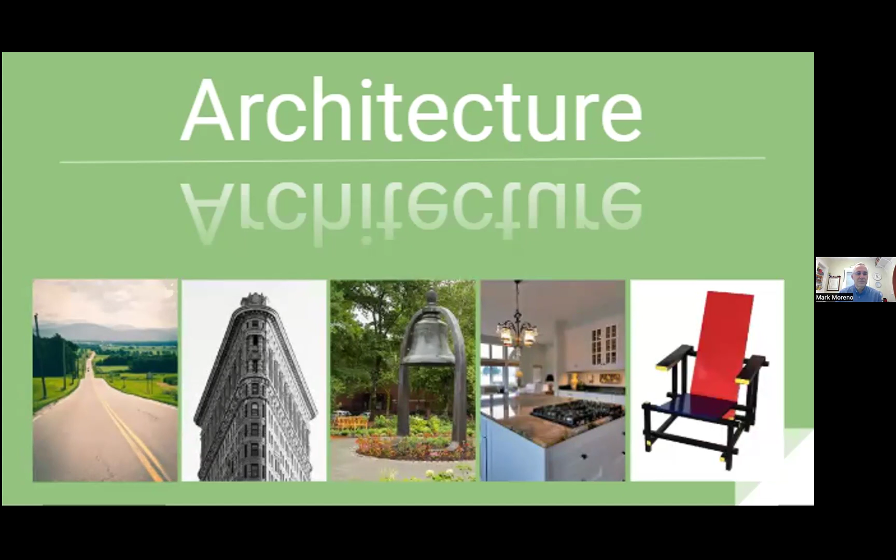Further, though, even more broadly, we're going to be talking about the design of streets, neighborhoods, and the idea of whole cities. Even further, architecture is a reflection of us as a species, and these are areas that I teach in. I teach person environment theory in a class called placemaking, and they're seriously dear to my heart.

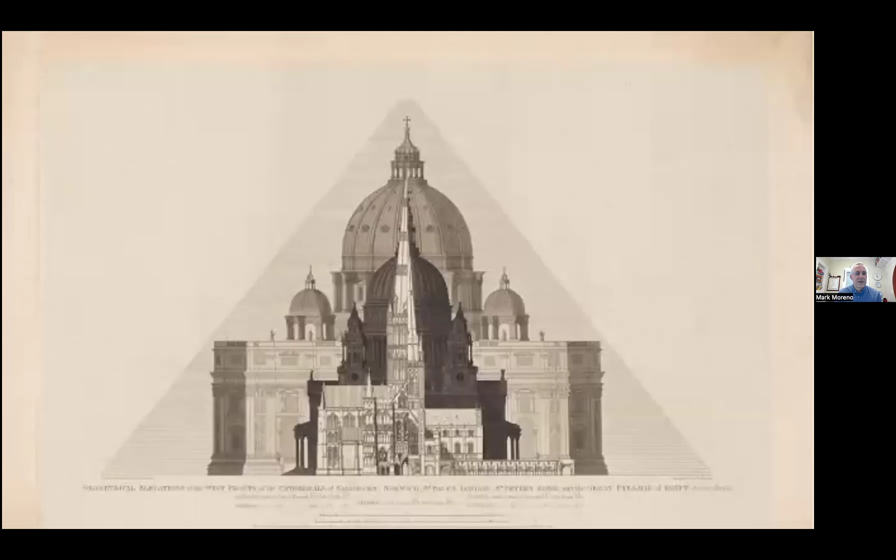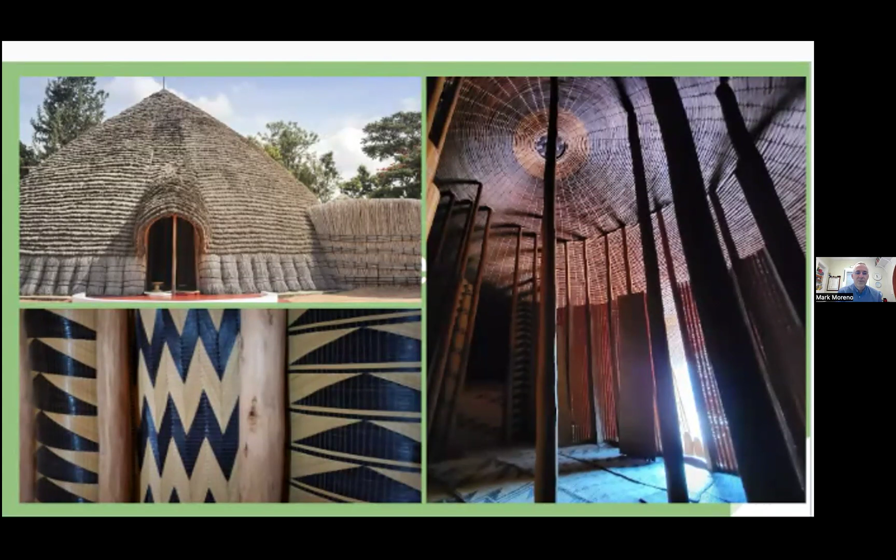Anecdotally, we don't have to have the most grand of buildings to understand the culture of a place. This is the former king's palace in Rwanda. I happen to be able to go here, and I'm sharing this. This is a beautiful, and wondrous space, that shapes and forms and structures, color, texture, and light.

Architecture also records some of the greatest of the world's tragedies. They become etched in our minds, and their memories stand as testament to human failings, individually and collectively, as testaments of heroism and awe also at the same time.

These are just a sprinkling of ideas about architecture, scratching the surface, so no one can comprehend the fullness of architecture's power. We each find our individual connections with architecture's power, be they subconscious and or conscious.

My hope, though, is that we each find an experiential fullness in the places that we find ourselves, be it at the Pantheon in Rome, which shapes and literally owns a slice of the sun, I guess figuratively, or a dabbling of light through the trees and window panes of a family breakfast nook. And while pondering these things, all great architecture wants to live a long and sustained life. But the only way to achieve this is to build better.

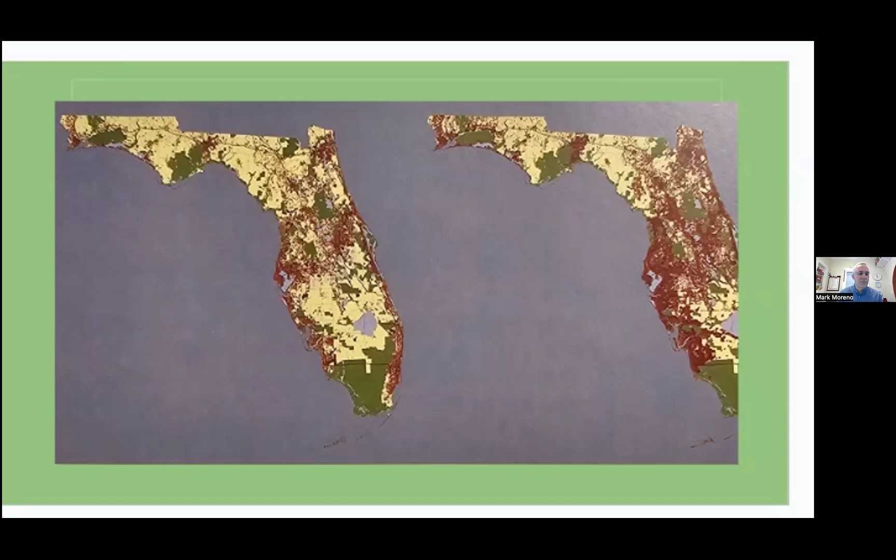So this is Florida, and a projection, it's a 50-year projection outward. So the red zone talks about populated areas, more densely populated areas. And the red in the right side image projects how much farmland and other land will be consumed if we continue to build in the manner that we're building.

So I've seen this analogy before, I think even in Environmental Fridays. The boiling frog is a metaphor that describes how people can become unaware of or unwilling to react to gradual threats. The metaphor is based on the idea that a frog placed in boiling water will jump out. But if a frog is placed in tepid water that is gradually heated, the frog won't notice, and the temperature will rise and the frog will perish.

So it's easy to understand, I think, from my own personal experience, that individuals don't really fully understand the impact of architecture, and this kind of architecture, and maybe not even understand their ability to make effective change. My wife and I studied architecture together, and the first time we ever really understood what is a real place was on a trip to Rome. And we walked around thinking, wow, this is real. And when we came back, I became depressed. We both became depressed, living in a place that was so placeless. And the formal eight years of my education didn't, at that time, from the 80s to early 90s, have a full grasp of this either, in architecture, that is.

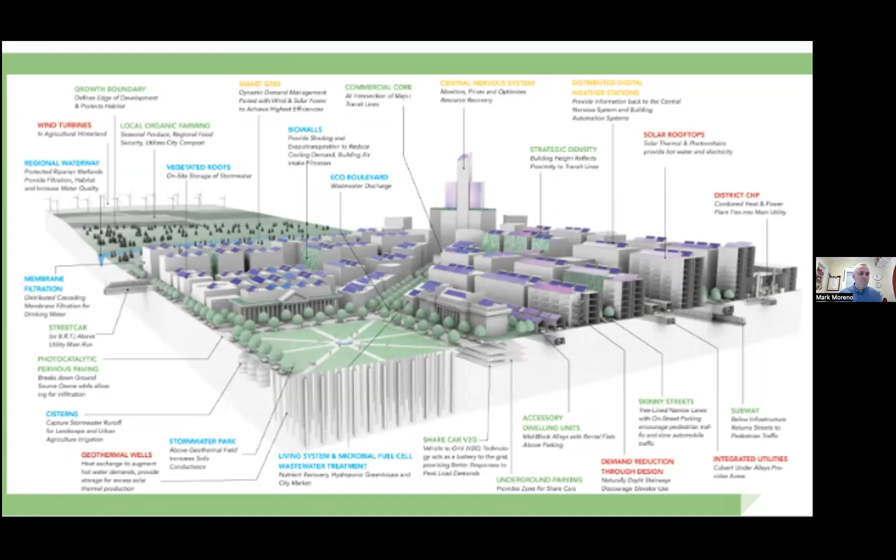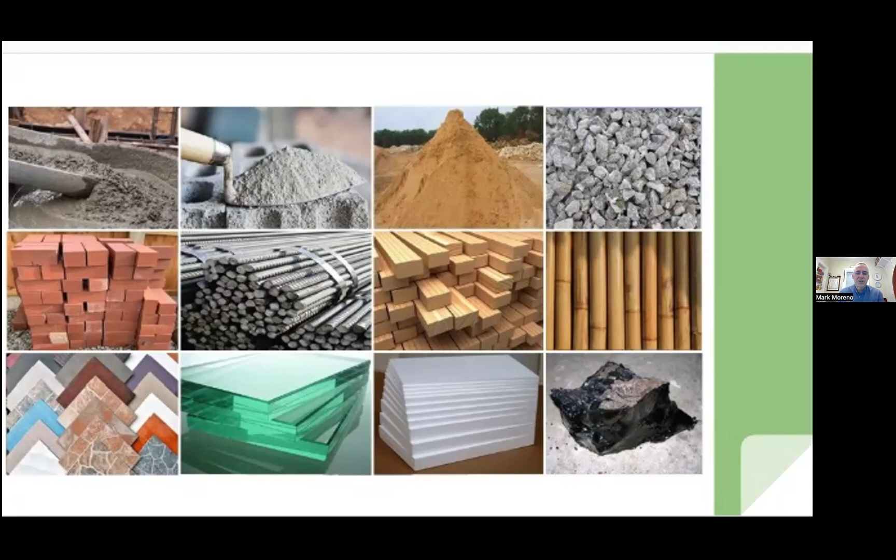Architects and engineers are involved in countless understandings, learnings and teachings about materials—recycling and using materials made from waste, materials that need less energy to produce, materials that use less water, materials that absorb carbon dioxide, which is a cool thing, and using renewable sources like timber and hemp for rethinking what is concrete.

There are organizations taking bold steps toward promoting greener living. LEED stands for Leadership in Energy and Environmental Design, a green building initiative. It's been around for a few decades, and people building buildings can apply to get a certificate, but it's largely expensive. Sometimes when you're chasing the tick marks to check off what you've done, it can stray from the fullest greenness. But again, it shouldn't be damned—it's a really great program.

After LEED came into popularity, the Well Building Institute started focusing on the greater impacts of what it means to people's human health and well-being. Buildings can be certified as Well Buildings when they've taken into account the quality of the air, the water usage, nourishment, light, fitness, comfort, and the comfort of the mind.

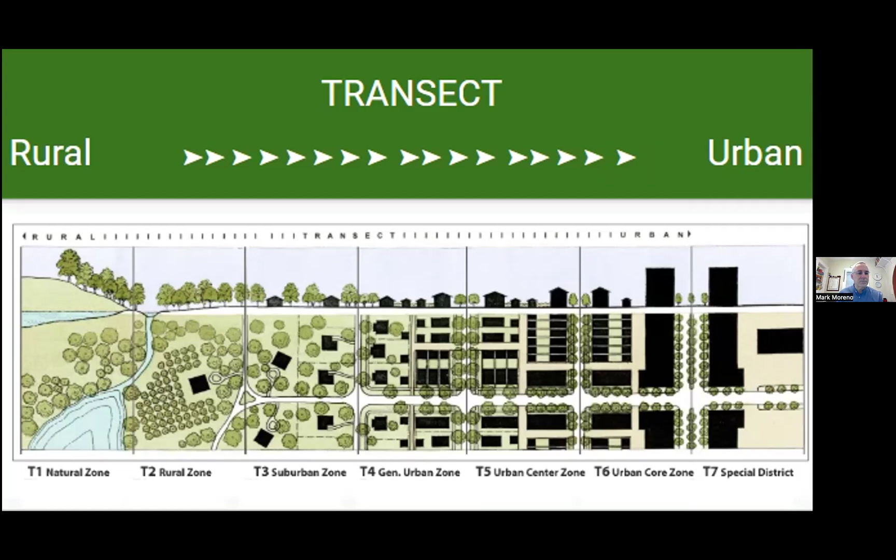New urbanists have changed the ethos of code regulations. They're making place-based codes, form-based codes, and redefining the authority that engineers and architects must follow. Some have even called me a communist because of my thinking that we can make compelling places—I used the word 'compelling' in a public forum once, and someone thought that meant making people do one thing or another. That's not what this is about. It's about providing choices for jurisdictions to make places that are walkable, because the codes are telling us what to do and what not to do, and it's not as healthy for us.

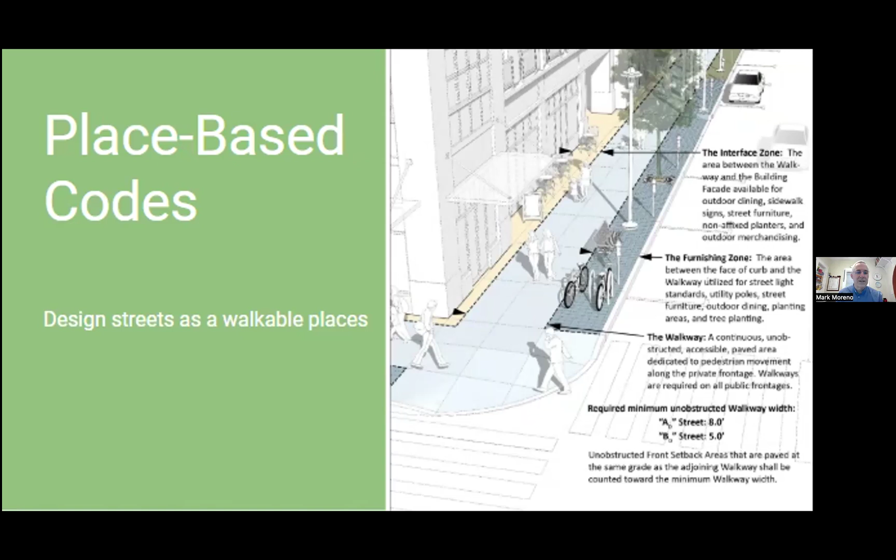So the discussion is, all of these words here are relatively new in the last few decades, at least within the span of my career. I'm not going to go into all of them, but all of them are hugely meaningful and important to the greening of the planet, and all of them are worthy of our accolades for sure. Only a test of time will make us aware of their best and truest efficacies.

All this is really to say that nature and cities are two sides of the same coin, and respect for one another—one can't exist and thrive without the other. We don't put walls around our cities anymore for protection, but we have a different enemy to fight, and that is the threat of global warming and calamity.

So architects are looking at different devices and strategies for making cities more walkable, more enjoyable. This is a term, one of those on the previous slide, the 15-minute city, where everything that you need—doesn't mean you have to live within the boundaries of that—but everything you need can be found within a 15-minute walk.

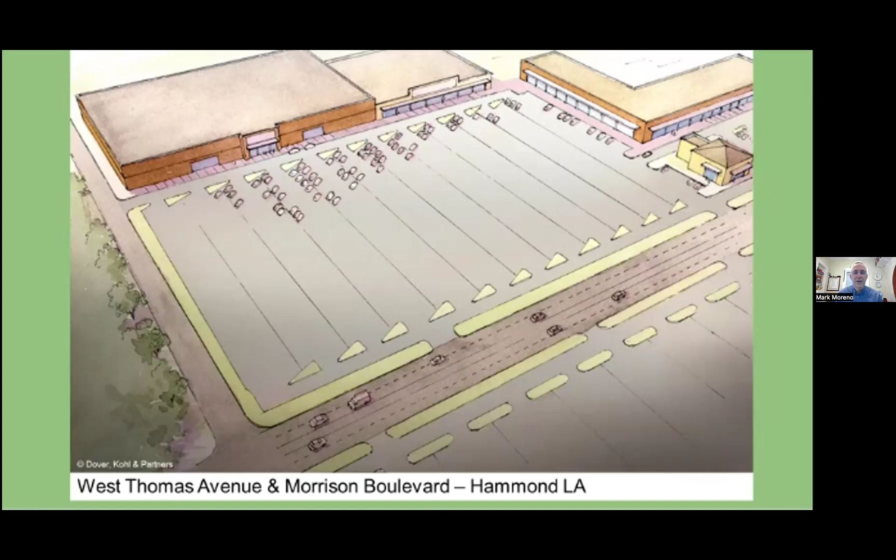Except on the fair day, like if this were Apple Valley, then we would say that the youth fair might fill this parking lot. But I trust that if it didn't, then the neighborhood streets surrounding it could bear the brunt of an extra traffic for a day or two.

But here's what architects are doing and urban designers are doing. They're making places out of parking lots.

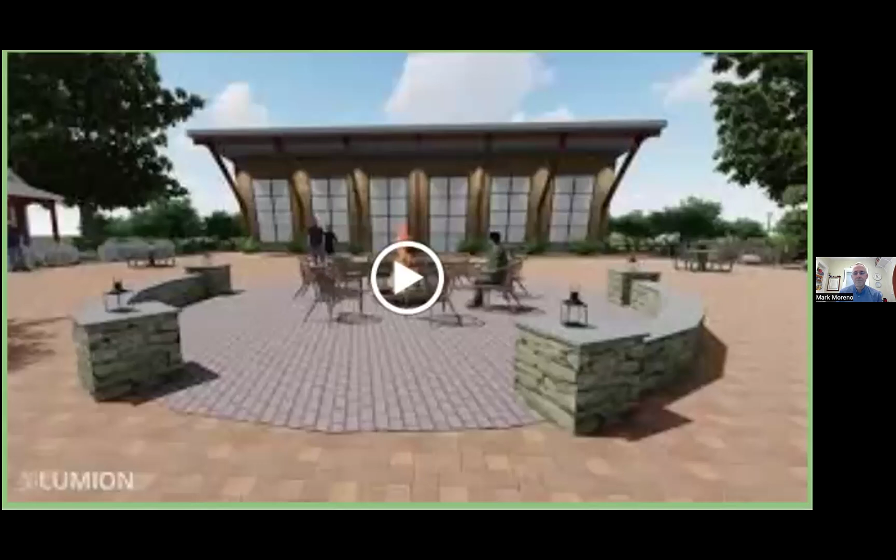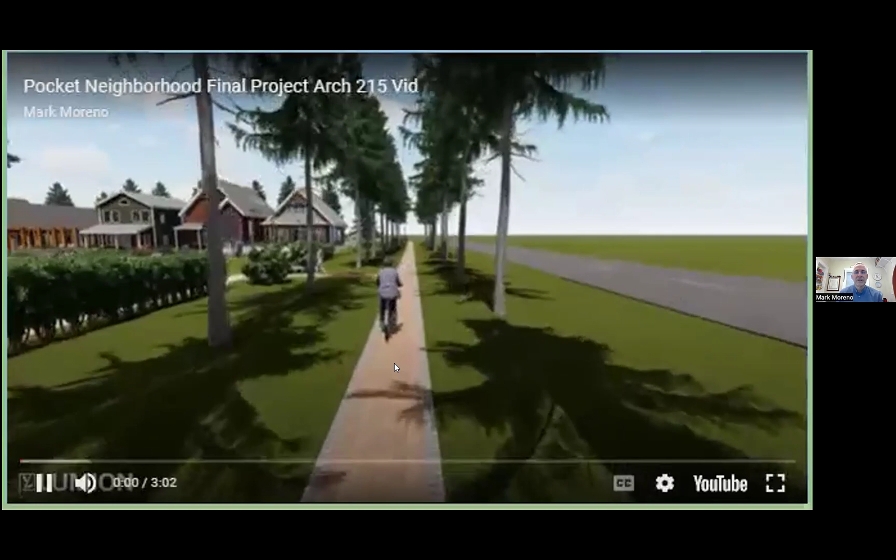This is a project my students worked on a couple of years ago, and I was involved in an initiative. Thank you to Princella and Desmond for that, and we'll keep pursuing it. It's called a pocket neighborhood, a way of creating a greater sense of community, a bit greater density, and tying this to agriculture.

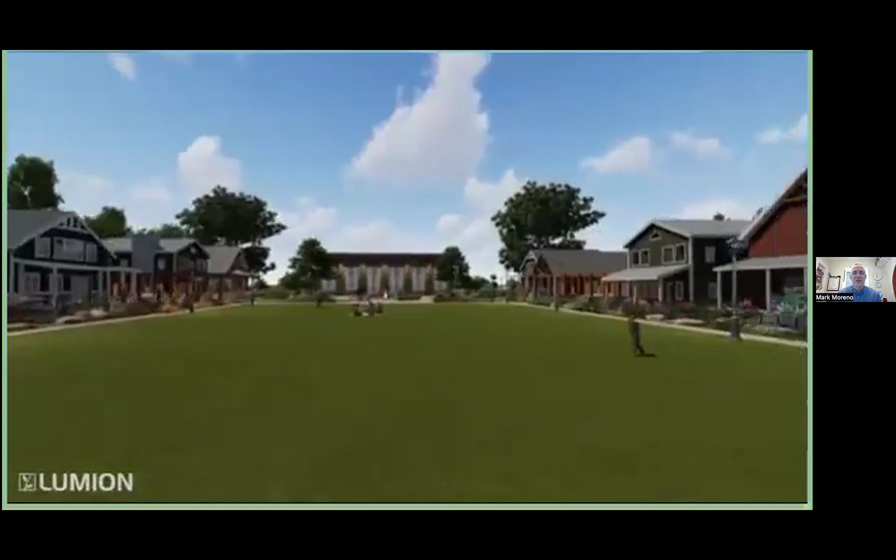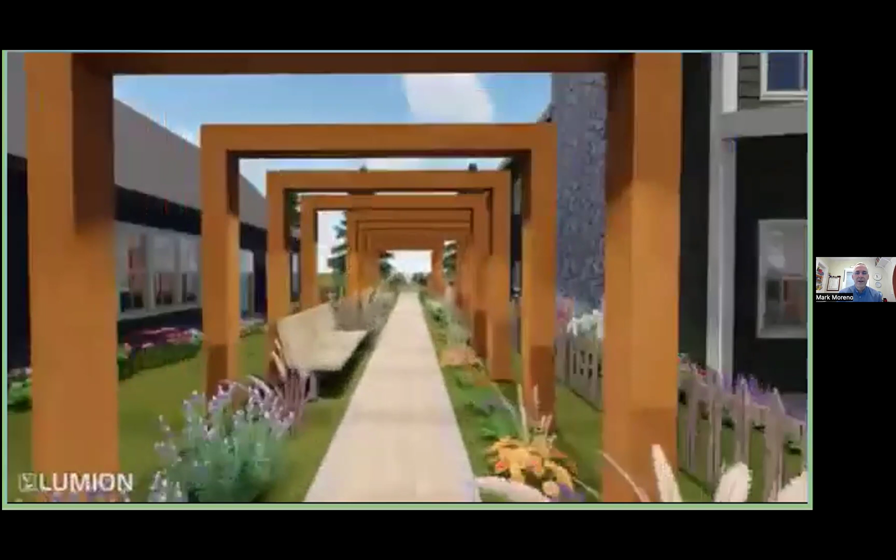A recent initiative is to make that community building you see in the distance a greenhouse, or make the space in between a community garden. Living more closely, we have a camaraderie, a collective ability to make a greater positive impact on our planet and on each other. For the sake of time, I'll stop this cycling and move to the next slide.

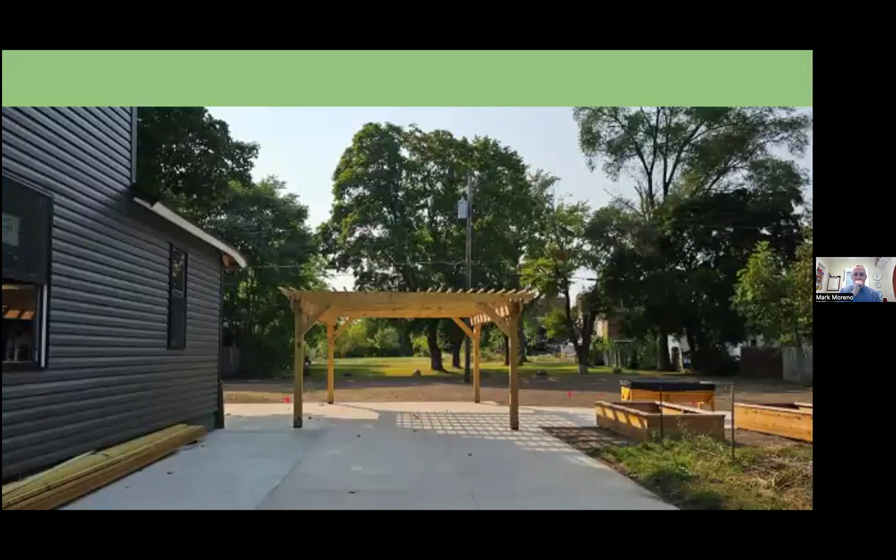In Renaissance Kids, I'm teaching children about urban design. I got a call one day and a parent said, 'Hey Mark, I learned from my 8-year-old how to slow the traffic down on a street.' I said, 'How's that?' She said, 'Narrow the street.' Urban designers are often barraged with, 'we need to widen the street,' but that's a misnomer—it's a slippery slope toward placelessness.

I mentioned Renaissance Kids here—let me go back a few slides. I want to tell you a story about this place. Omar was an 8-year-old boy, and I asked, 'So what do trees give you?' He said, 'Oxygen.' I said, 'Omar, I wasn't even thinking about oxygen, I was thinking about shade and beauty.' He said, 'Well, you'd better.' It reminded me that children often know about global warming or recycling—Omar was trying to save the planet while I was just trying to save this single street.

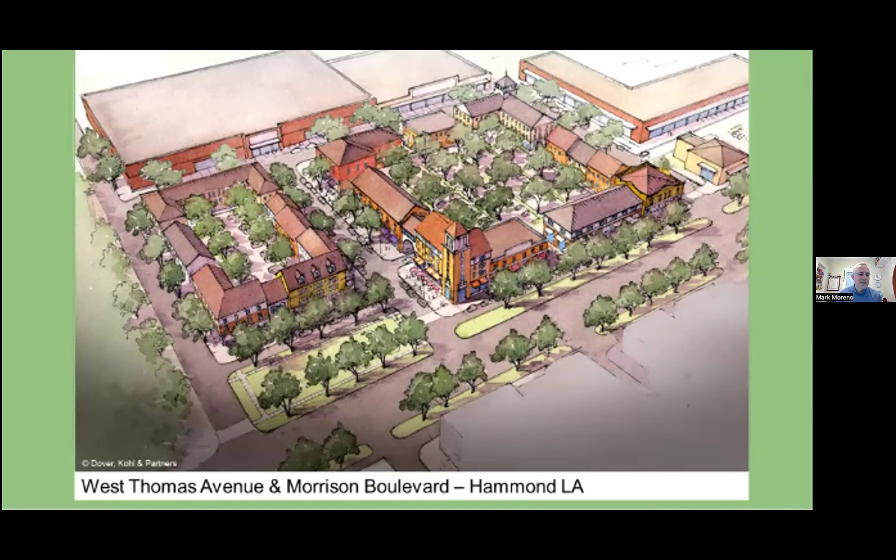Couldn't be more proud. Then in the spring, my graduate students are designing a kitchen to accompany the garden—it's called the I Can Kitchen. They'll be canning and jarring and creating lessons for how to harvest and how to monetize, how to maybe make a business out of being closer to the earth and growing food.

During the camp, Kevin Moore would often pump the kids up every morning: 'Who can be respectful? I can. Who can do this? I can. Who can treat their neighbor kindly? I can.' So we have this initiative born out of this experience with children. Couldn't be more happy and proud to be involved. Our graduate students last year also designed pathways in the raised garden beds to make it accessible for people in wheelchairs.